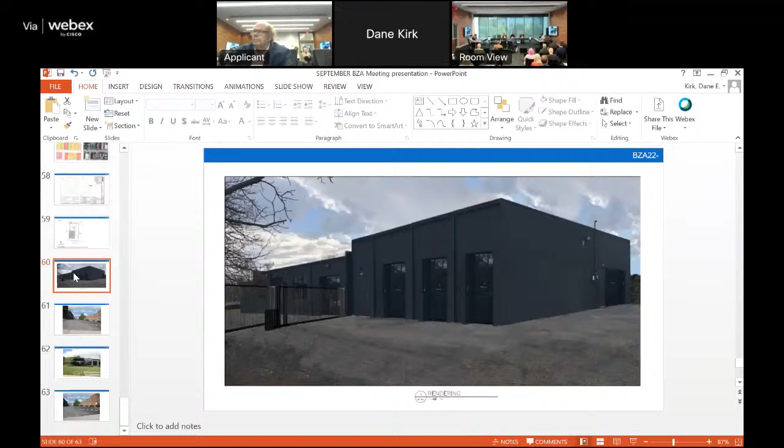The applicant proposes to legitimize an existing parking area and is requesting a variance to allow parking spaces to reduce the minimum parking space size from 9 by 18 feet to 9 by 17.9 feet. Planning has no comment on the variances as the Fifth by Northwest Area Plan and Columbus citywide planning policies do not address individual parking spaces. Planning acknowledges that the variances are to legitimize existing site conditions, which are generally consistent with the plan's design guidelines. Division of Traffic Management has no comments, and the Fifth by Northwest Area Commission recommends approval of this request. Staff can also recommend approval as the variances are negligible and are to legitimize existing conditions which are generally consistent with the plan's design guidelines.

This should be a no-brainer for us guys. Yes, thank you very much.

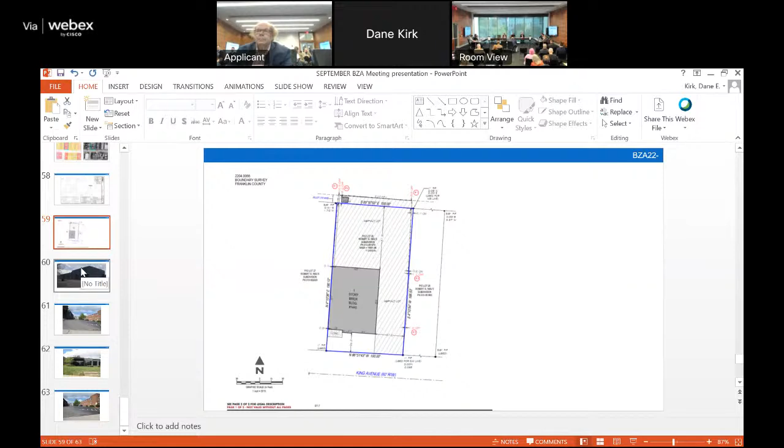Mr. Bender, do you have the recommendation of the Fifth by Northwest Area Commission as well as city staff? We would agree that it is a negligible reduction or a request for reduction.

Do you have anything additional that you would like to add at this moment? Just that I'll take any questions that you might have. Okay, and thank you for bringing this up.

I've been on the graphics commission for 28 years, so. Thank you for your service, excellent job you do, and you got a big business. I know I'm not saying a whole lot. Okay, thank you so much.

Is there anyone in the audience that would like to speak for or against this proposal? Seeing and hearing none, the question's been called.

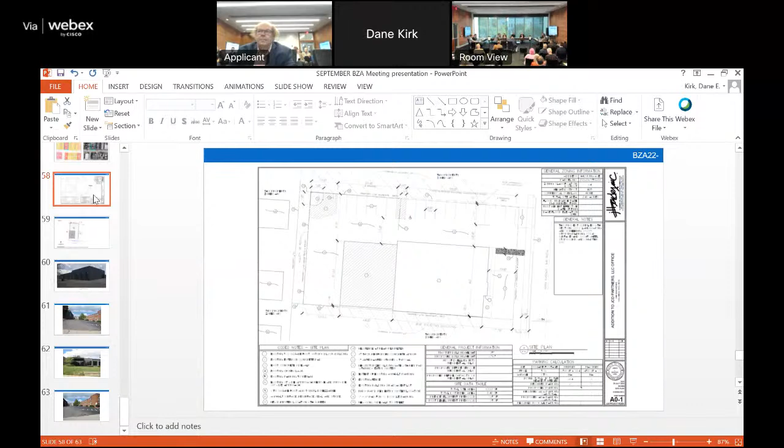Please call the roll. Mr. Malika, yes. Mr. Mora, yes. Chair Jones, yes. Your variance is granted. Good luck with your project. Thank you so much, my pleasure.

Case BZA 22-026, 1812 West Fifth Avenue. Hello sir, would you please give us your name and indicate whether or not you've been sworn? David Hodge, attorney for the applicant, and I have been sworn. Thank you very much, Mr. Hodge. City staff? 1812 West Fifth Avenue is located at the northeast corner of West Fifth Avenue and Wyandotte Road.

The site is zoned C4 commercial and is within the Fifth by Northwest Area Commission. The site is currently developed with a dry cleaning operation. This current use is a mix of commercial, including retail, eating and drinking, and office. The applicant proposes to convert the existing building to an eating and drinking establishment and requests a variance to legitimize existing conditions for a parking lot and reduce the number of additional parking spaces from 23 to 0.

The existing condition, I'm sorry, 23 to... 6. 6, yes, that's a new change, new site. The existing conditions are reduced aisle, reduced maneuvering, limited parking space, and a reduction in the number of bicycle parking spaces from 2 to 0 as well. Bicycle parking will be located in...

Planning generally supports the proposal, but requests additional bike parking to mitigate the parking reduction. As I said, the parking will be provided in the aisle. However, since it's not in the property, a variance is necessary.

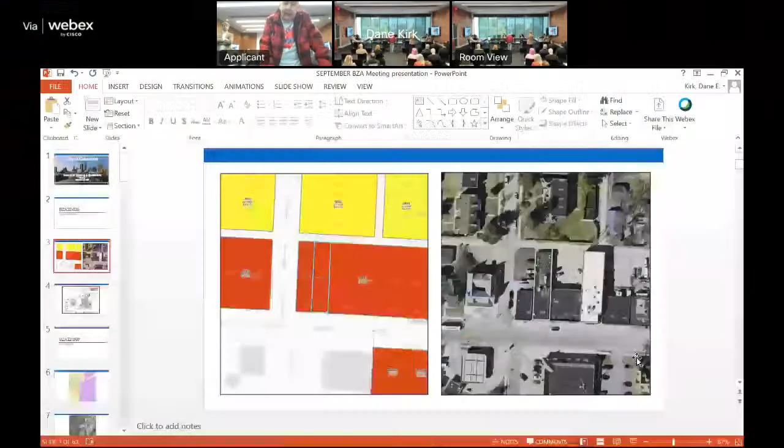So does anybody have any questions for me? What kind of business do you have? There's a bookstore currently, I'm repairing my building. It has been a laundromat and I had fire damage, so I'm in the process of fixing the building back up. And then there's a bookstore next door where the building is also being repaired due to smoke damage. But as I said, I've owned the building for 50 years, and parking has always been tough on Fifth Avenue, and with all these variances, it'll drive me crazy.

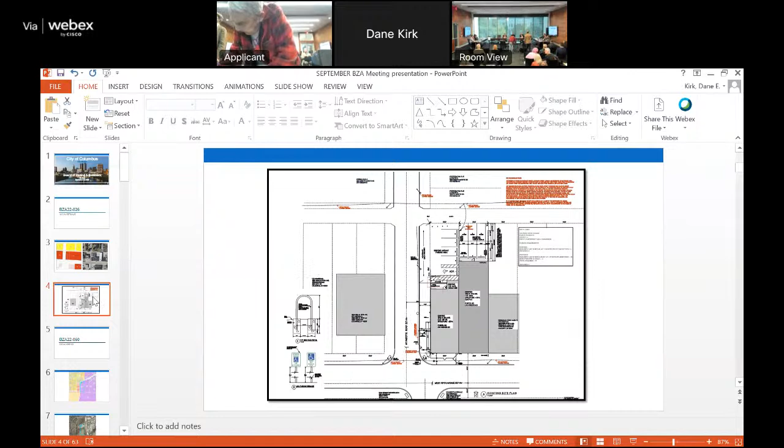Okay, would you please sign in on that sheet? Sure, thank you so much. Is there anyone else here to speak for or against the proposal? Any questions from board members? I'm a little confused. So if he owns a laundromat, I thought you were buying a laundromat. So I'm confused.

I believe his use is just east of us here on the screen. So if I could come up here. This was a laundry facility here, Mr. DeMoro, and what we aim to do is knock the back of the building off and do that stack configuration. I believe this is this gentleman's property here, and he had some kind of laundry in there at some point, and it's been, I guess, in the process of being converted to a bookstore.

What's interesting about this site is you can see that it's built right from the southern property line to the northern property line at the alley. It's a C4 property, commercially zoned, probably C4 since zoning got adopted in the city of Columbus. Commercial use with how many parking spaces on it? Zero.

This is a condition in these older developed urban neighborhoods where zoning came along after the fact and assigned the most appropriate zoning, but it never has met the development standards. Here we have a very successful business that came in and made use of this. They're providing the parking here. They want to expand into here and do this. Some of these variances we're talking about with the aisle and maneuvering are just technical variances that allow this stacking configuration we discussed on the site plan. It's really a suburban standard, and we're in an urban neighborhood here.

But if there are issues, a need for us to reach out to the adjacent property owner and work through some of this with a board of 3, I'd like to hear about it. We can table and go back to the drawing board and come back and have a hearing next month.

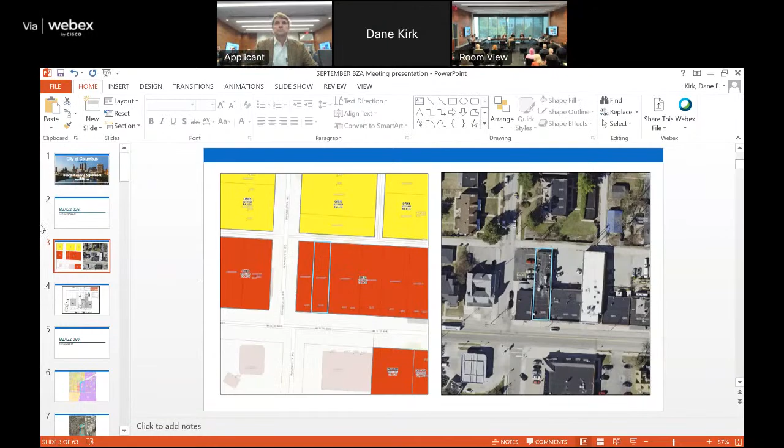Anyone want to call a question? I'll call a question. Question's been called, please call the roll. Mr. Morrow? Yes. Mr. Malika? Yes. Chair Jones? Yes. Variances are granted. Good luck. Thank you all very much.

Please give us your names and indicate whether or not you've been sworn. I'm Joel Sigler with AEP, and yes, I've been sworn. John Worley, consultant, and have been sworn. Please sign in on the list.

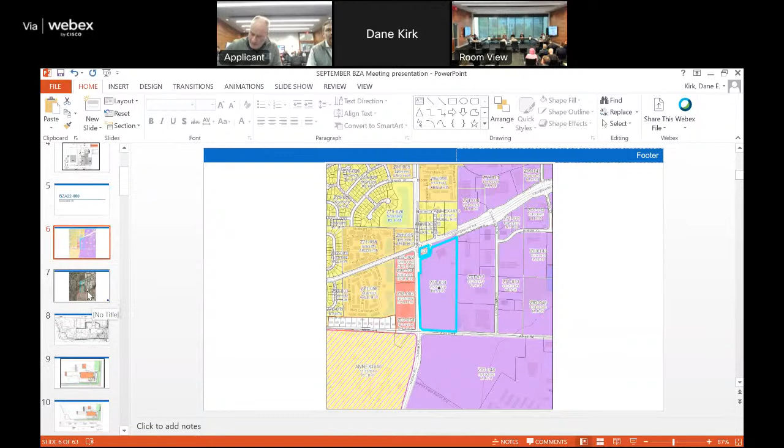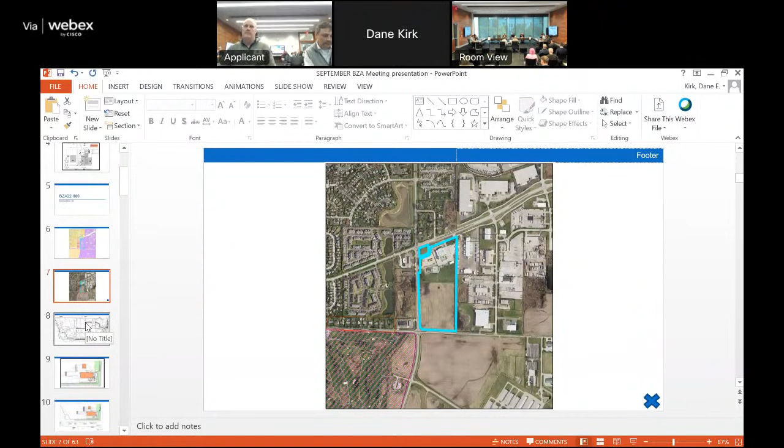BZA 22-060, 5500 Alkire Road is located at the northeast corner of Norton Road and Alkire Road. It is zoned M1 manufacturing as part of the Westland Area Commission. The 14.73 acre site is undeveloped. Surrounding uses are commercial to the west, an undeveloped parcel to the south, and residential to the north. The applicant proposes to construct an electrical service center with parking and a backflow prevention meter enclosure. Variances are requested to reduce the building setback from 200 to 133 feet and to reduce the parking setback from 25 to 5 feet.

Planning is in full support of this proposal. The revised site plan includes landscaping screening along Norton and Alkire roads, consistent with C2P2 planning guidelines. Staff supports this proposal with the understanding that applicant will consult with the city forester on the placement of street trees along Norton and Alkire frontages. Division of Traffic Management has no comments, and the Westland Area Commission recommends approval of this request. Staff recommends approval as the proposed site plan is consistent with C2P2 guidelines, with the condition that the applicant commit to a stamped landscape plan.

Mr. Chairman, thank you Adam. Is this the one that we didn't notice the public previously? Okay, thank you. So we've heard this, and you have the recommendation of city staff and no concerns from traffic management. Is there anything additional that you feel you need to add? We're just answering any questions you might have.

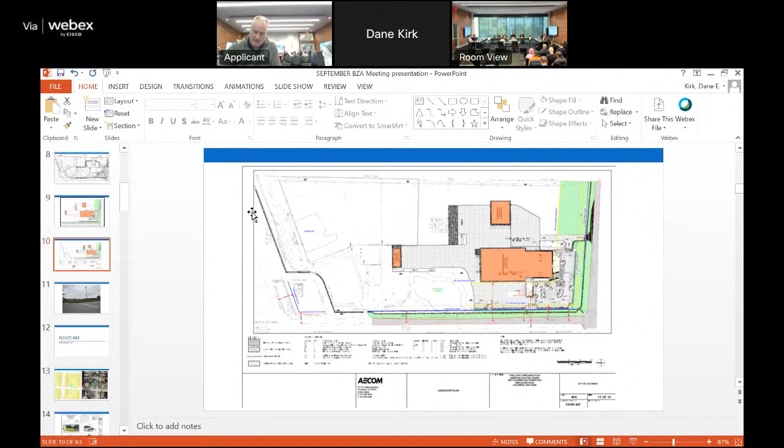Is there anyone in the audience that would like to speak for or against this proposal? Question. The question's been called, please call the roll. Mr. Malika? Yes. Mr. Morrow? Yes. Chair Jones? Yes. Variance is granted.

Good luck with your project. BZA 22-061 for 928 Siebert.

Hello, would you please provide your name and indicate whether or not you've been sworn? Delicia Magania Gonzalez. Yes, I have. Did they take the sheet to sign? Yeah, that's in front of you. Yes please, are you authorized? I don't see your name down as an applicant or the agent.

BZA 22-061, 928 Siebert Street is located on the north side of Siebert Street, approximately 140 feet east of Ohio Avenue. It is zoned R4 residential and is part of the Columbus South Side Area Commission. The 0.05 acre site is undeveloped. Surrounding uses are primarily single and two-unit dwellings. The applicant proposes to construct a single-unit dwelling with an attached garage.

Variances are requested to reduce the minimum side yard requirements from 5 feet to 3.5 feet, to reduce the minimum rear yard percentage from 25 to 20.3%, and to allow a single-family dwelling to be situated on a lot less than 5,000 square feet in area.

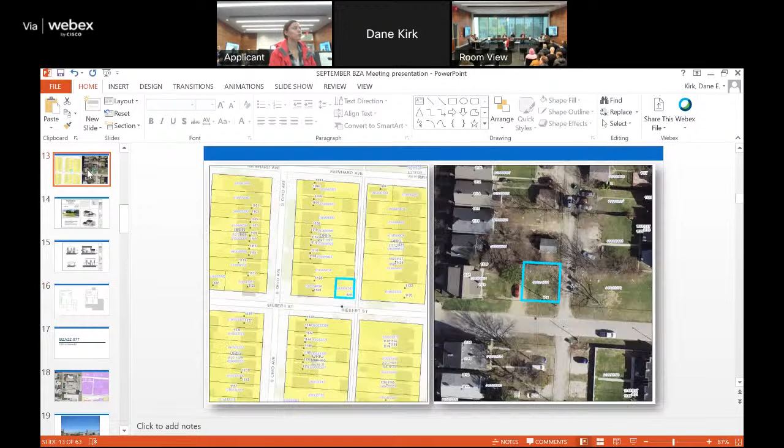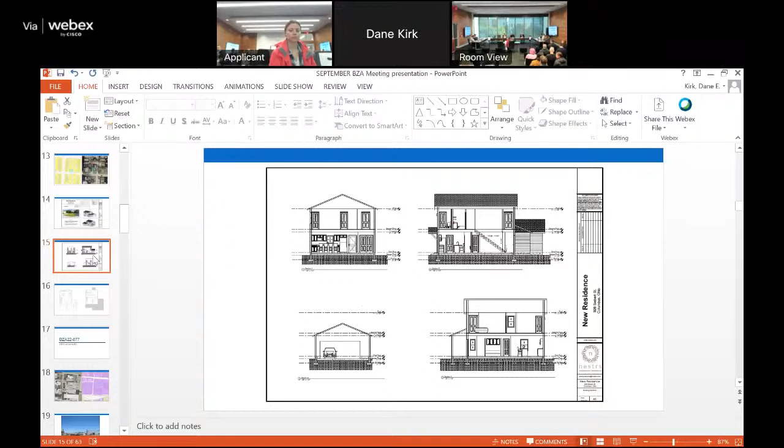Planning is in full support of this proposal. The site plan and elevation relocates the garage to be accessed from the alley, consistent with C2P2 guidelines, while preserving windows and doors addressing the Siebert Street frontage. Staff support with the understanding that the site plan will be revised to include a sidewalk along Siebert and possibly a relocated tree in response to comment from the Division of Traffic Management.

The Division of Traffic Management comments that the proposed building construction sidewalk will be required to be constructed along the Siebert Street frontage of the site. Staff can recommend approval. The site plan and elevations relocate the garage to access from the alley, consistent with C2P2 guidelines, preserving the windows and doors addressing the Siebert Street frontage, with the condition that the final site plan will include a sidewalk along Siebert Street.

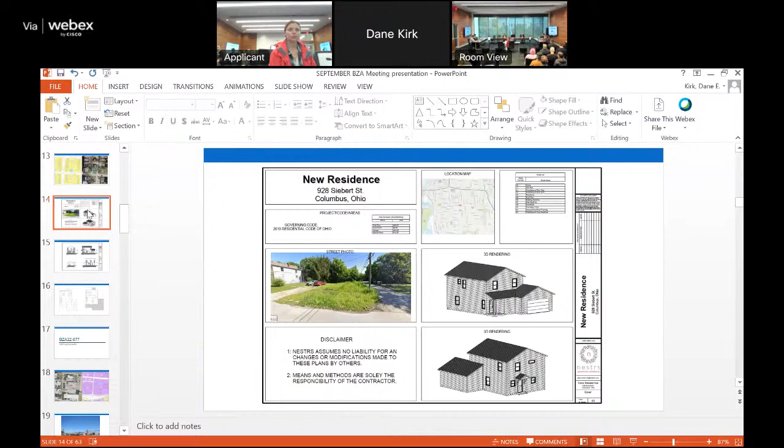Okay, thank you very much, Adam. You have the recommendation of the area commission for acceptance, as well as city staff. Would you like to add anything additional?

No, that sums everything up. We will add a sidewalk along Siebert Street, and we did move the tree out of the field of vision for the traffic department. Basically, we're just requesting these variances so the vacant lot can be buildable.

Okay, thank you so much. And I'm just curious, is R4 also zoned for multifamily, and you chose to build a single family home? Yes. Okay, this condition that is stated here, you're saying we don't need that? The condition will remain, you just don't need to stamp the sign. Got it, thank you.

Is there anyone in the audience who would like to speak for or against this proposal? Call the question with the condition. Question's been called. Mr. Morrow? Yes. Mr. Malika? Yes. Chair Jones? Yes, variance is granted. Good luck with your new home.

Thank you. You're welcome. BZA 22-077 for 2260 Lockbourne Road.

2260 Lockbourne Road is located on the east side of Lockbourne Road, approximately 300 feet from Refugee Road, and it's zoned M Manufacturing and is part of the Far South Columbus Area Commission. The 4.69 acre site is developed with a maintenance service center. Surrounding uses are primarily manufacturing.

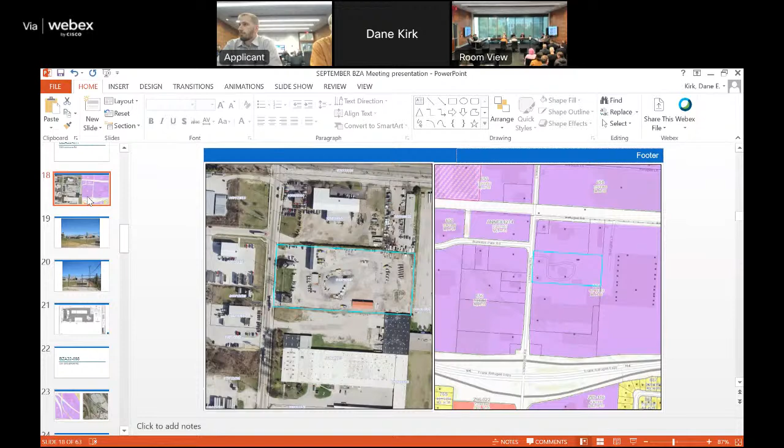Thank you very much, Adam. Can somebody walk me through this vision clearance thing? I don't understand where we are with that. Why are we recommending approval to it? Yeah, can I, if I see it, maybe I'll understand it better.

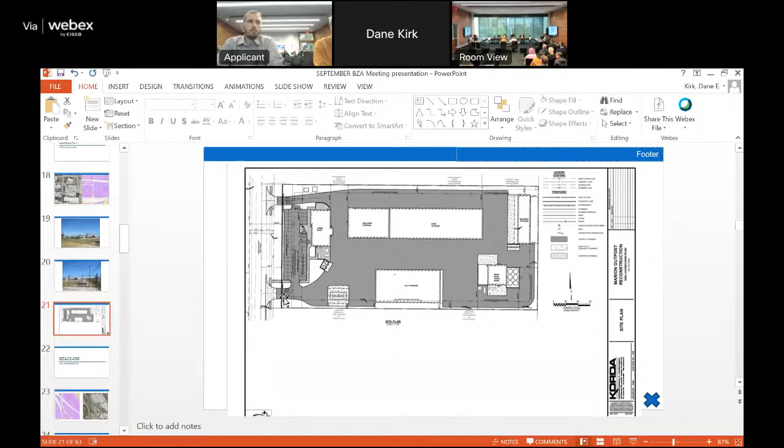That's the exit on the Lockbourne? Yeah, entrance and exit, or? I'm having trouble just, maybe traffic, because I know they've gone back and forth a couple times with traffic. So, I believe they are, so it's either obstructed or it's not. Could you just reflect, possibly zoom in on that, to show the vision clearance where that would be requested?

Does the sidewalk obstruct it, or what's the obstruction? Probably the fence. It looks like there's just a right of way that's being required to be dedicated.

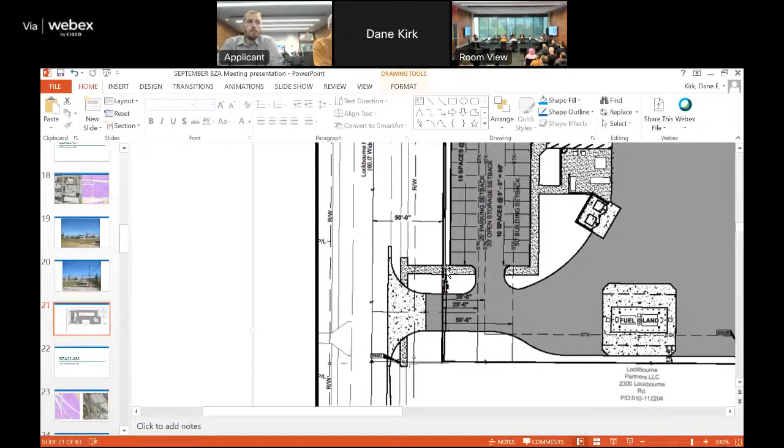As you can see, the sidewalk is well set in front of the fencing. So there is a variance that almost looks like reducing it to zero. That would not obstruct the sight lines for folks to see pedestrians walking along Lockbourne, and there's ample space to see when a vehicle exits onto Lockbourne to see conflicting traffic. So it's really a function of the additional right-of-way dedication that's being required.

Got it, thank you so much. Anything additional that you'd like to add?

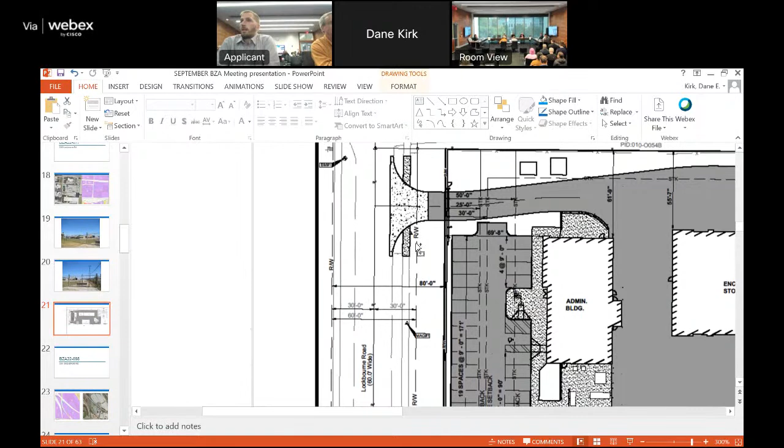Yeah, just on that topic - the plan we're looking at is actually an older one. We submitted several revised ones that are more up to date. The fence actually did shift back a little bit. You mentioned zero setback - it's actually 5 feet now.

Well, where are these plans? We need to know what is real today. Well, what's on the agenda is the accurate variance request. It's just this is not accurate. Yeah, they went to chain link fence with 5 feet, went to 5 feet, not 0.

Okay, anything additional? Yeah, sure. So it really just comes down to the space on this site. The public service has a specific set of requirements for these facilities, and their equipment and vehicles take up a lot of space, need a lot of maneuvering. So we're trying to use every square foot of this property that we can, and allowing these variances helps us best do that and help them best serve the public with this facility. Okay, thank you so much.

Anyone in the audience who would like to speak for or against this proposal? Seeing and hearing none. Question.

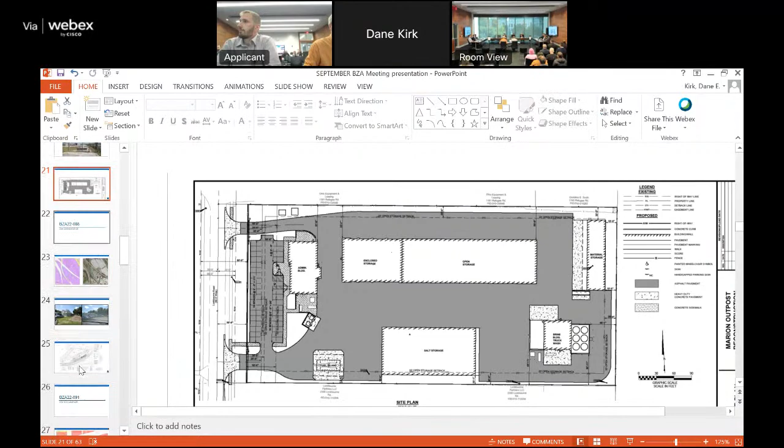Question's been called, please call the roll. Mr. Malaka? Yes. Mr. Mora? Yes. Chair Jones? Yes, variance is granted. Did you guys sign in? Yes. Thank you so much.

Case BZA 22-088, 3501 Groveport Road. This you, Adam? Oh, no. Gets a little break.

Hello, Mr. Ingwerson, I don't think you were here to be sworn. Could you please raise your right hand? Do you swear or affirm that the testimony you'll provide is the truth to the best of your knowledge and belief? If so, say I do. I do. Thank you so much. Just sign in there for me if you would. Yeah, and go ahead, Stephen.

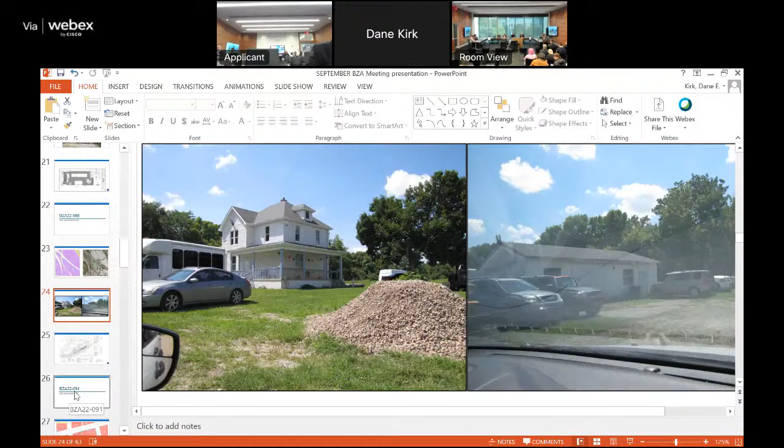3501 Groveport Road is located on the east side of Groveport Road, approximately 880 feet northwest of Williams Road. It is zoned M Manufacturing District and is located in the Far South Columbus Area Commission. The 7.22 acre parcel is currently developed with 2 structures and is utilized as storage space for a truck repair business located directly to the southeast. Surrounding uses are primarily manufacturing, with a railroad bordering the property along the northeast property line, a distribution center to the northeast, a truck repair and storage facility to the southeast, a recycling plant to the west, and a train yard further to the northwest.

The applicant proposes to utilize the property as an automobile salvage yard and is requesting a special permit to allow an automobile salvage yard in an M manufacturing zone district. The plan supports the proposal as presented.

The Tri-South neighborhood plan states that expansions of existing uses shall be screened to reduce noise and obscure views. C2P2 states that external storage which generates noise and other impacts should not face the public right of way and should be fully screened. Planning notes that the proposed location does not front on any right of way, is naturally screened to the north and west, and abuts similar outdoor storage to the south and east. Furthermore, the proposal calls for fencing which will further screen the proposed use. For these reasons, planning supports the proposal as presented.

The Division of Traffic Management is working with the applicant to resolve potential minor issues with configuration of the southern emergency access lane, connection with the main site entrance drive, as part of the final site compliance plan process. All other Division of Traffic Management staff review comments have been resolved - I believe since the writing of this report that comment has been resolved, and they've just taken care of the emergency access lane.

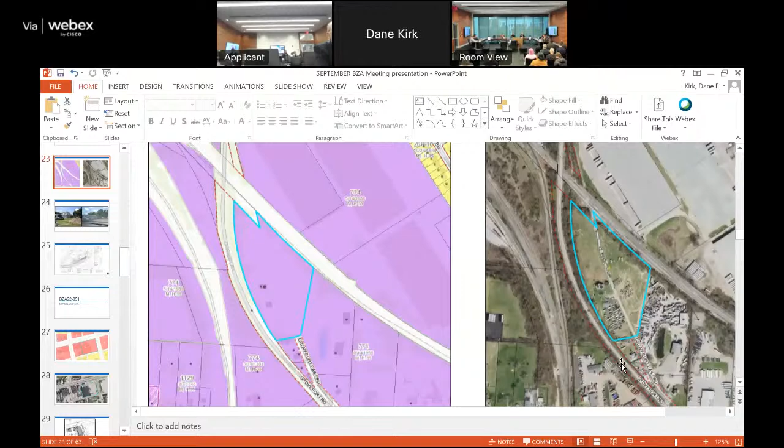Thank you very much. Mr. Ingwerson, are you okay with the condition of maintaining the existing screening? Yes. Okay, do you have anything additional?

You do have the recommendation of approval from the City of Columbus. It sounds as though you're resolving issues with traffic management, as well as recommendation of approval from the Far South Columbus Area Commission. Anything additional you'd like to add? Unless you have any questions.

No. So you've been cited on this because you guys were operating this before you had the permit to do so. Is that correct? Correct. And had you not been caught, would you still be doing it?

Yeah, yes. I mean, the actual development of the site needed a special permit, and it was explained to the owner that that's what needed to happen. So he engaged another engineer before he engaged me, and we're trying to go through the process and get him squared away. Okay.

Anybody in the audience who would like to speak for or against this proposal? Any additional questions from board members? I'll call the question. Question's been called.

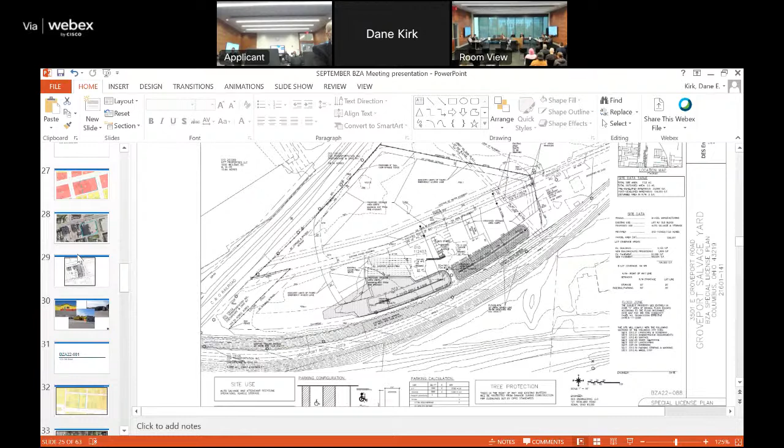Please call the roll. Mr. Morrow? Yes. Mr. Maleka? Yes. Chair Jones? Yes. Special permit is granted with the condition as recommended from the city.

Thank you very much. And did you sign in for us? I did. Thank you so much.

BZA 22-091 for 1454 Oak Street. Thank you.

William Fisk, I live at 1454 Oak Street. And you've been sworn, Mr. Fisk? I have. Thank you very much. Sign in on the sheet there, and you can have a seat.

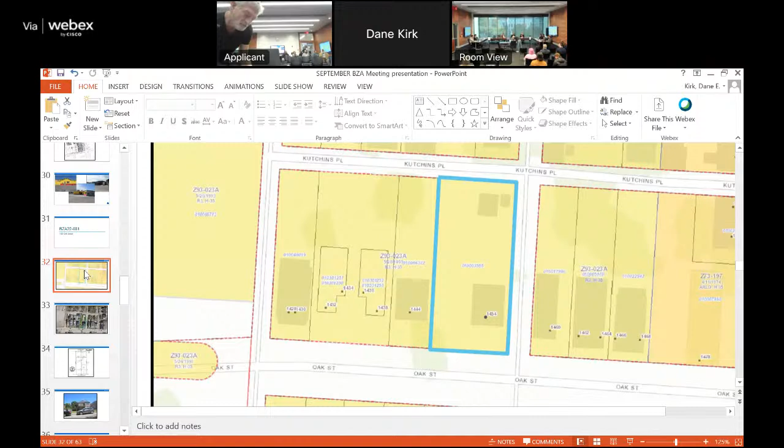1454 Oak Street is located on the north side of Oak Street, approximately 235 feet west of Miller Avenue. The site is zoned R3 and is located within the Near East Area Commission. The 0.25 acre site is currently developed with a single unit dwelling on a 72-foot wide by 153-foot deep lot. Surrounding uses are single and 2-unit dwellings.

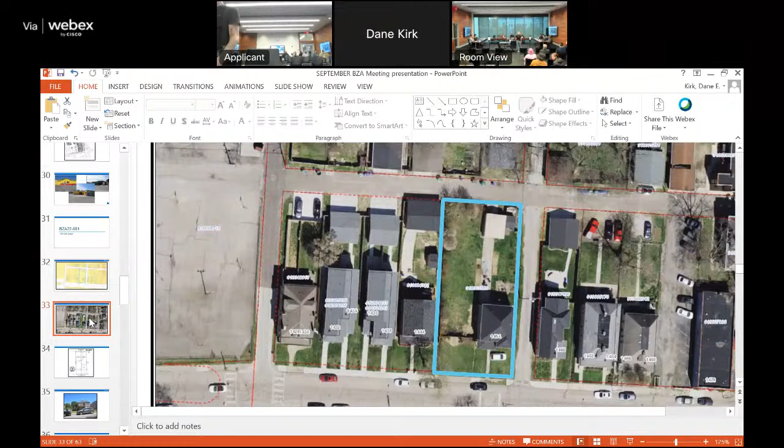The applicant proposes a lot split so that they can sell or develop the new lot. The request is a variance to reduce the lot width of parcel A from 50 feet to 37.4 feet, and to 34.6 feet for parcel B. So the existing lot A with a single unit dwelling is here. This would be the new lot after the split. The Near East Area Plan recommends that housing should be developed at the existing parcel sizes.

The Division of Traffic Management states that no access, such as a driveway, will be permitted to Oak Street, and that access to the site will need to be taken from Kutchins Place, the alley to the rear. The Near East Area Commission recommends approval, and city staff can also recommend approval, as the proposed lots would return the sites to their original parcel sizes as recommended by the plan and is therefore supported.

We're not asking for any conditions. Thank you very much. You have the recommendation of approval from the area commission as well as the city staff, with no issues with traffic management except for access. Do you understand that? Yes. Okay, anything additional you'd like to add? No. Thank you very much.

Anybody in the audience who would like to speak for or against this proposal? Any questions from board members? I'll call the question. Question's been called, please call the roll.

Mr. Malaka? Yes. Mr. Mora? Yes. Chair Jones? Yes, variances are granted. Good luck with your project. Thank you very much. Yes.

BZA 22-092, 130 West Henderson Road.

Good evening. Good evening. Thank you, what is your name? Robert A. Harwood, representing Cameron Nickel. And you've been sworn? Please raise your right hand. Do you swear or affirm that the testimony you'll provide is the truth to the best of your knowledge and belief? If so, say I do. I do. Thank you very much. Please sign in.

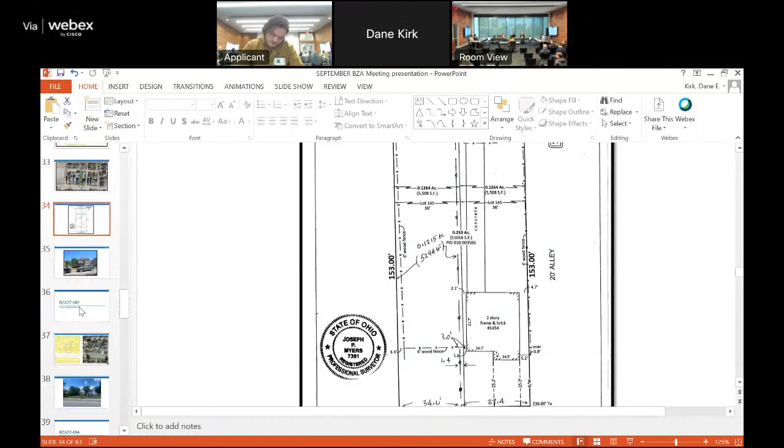BZA 22-092, 130 West Henderson Road is located on the north side of Henderson Road, approximately 280 feet west of Rosemary Parkway. The 1.11 acre site is developed with a single unit dwelling. Surrounding uses are primarily single unit dwellings. The applicant proposes to install a vehicle turnaround area in front of the dwelling.

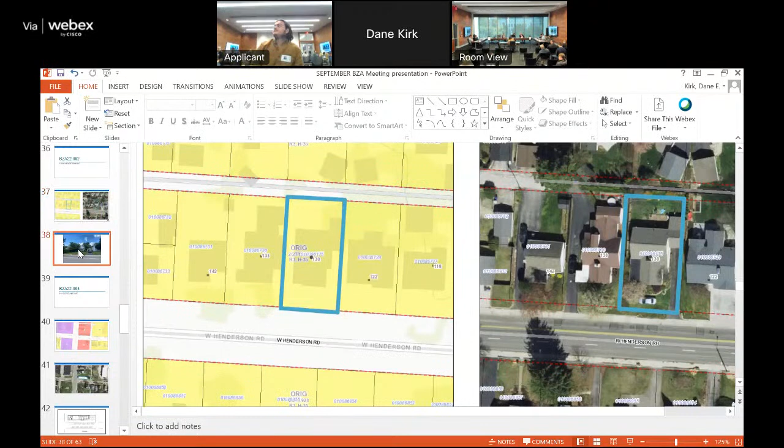A variance is requested to allow a maneuvering area between the street right-of-way line and the parking setback.

Planning is supportive of the received site plan and requests some form of landscape screening along Henderson Road frontages prior to moving full support, consistent with the Clintonville neighborhood plan guidelines of balancing parking needs with the impact of the natural environment. Division of Traffic Management has no comment, and the Clintonville Area Commission recommends approval of this request.

Staff can recommend approval as the requested variances allow for safer entry from a driveway onto a highly trafficked road, and the proposed area will be used as a turnaround and not for vehicle parking. We have the condition that the site plan be stamped, so they cannot park a vehicle there. It's just for turnaround.

Thank you, Mr. Chair. And you do understand that, right? Correct. I'm just curious, do you plan to improve the surface? Yeah, we received quotes on getting asphalt. Are we okay with that? Yeah, they would need a variance otherwise to park or turn around on gravel or grass. I was just thinking asphalt's pretty covering. Have you thought about pavers, like open pavers, so grass can still grow? You're not creating a concrete jungle or asphalt jungle. It's been a consideration, but I think we'd like it to match the current driveway. But again, it's not really for driving, it's for maneuvering. But up to you. Anything additional you'd like to add?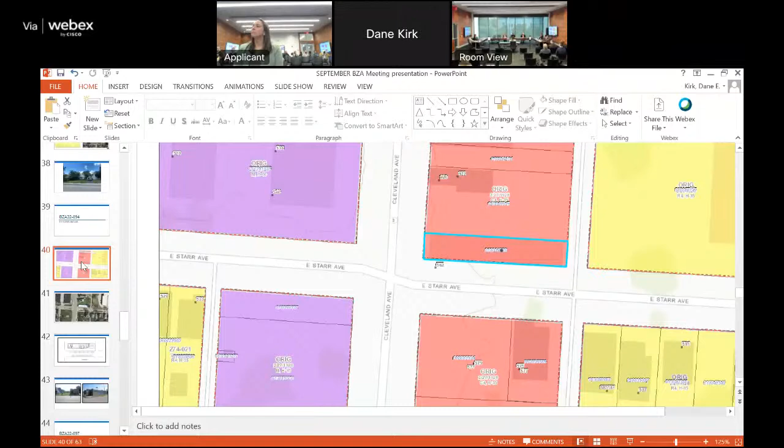BZA 22-094, 914 Cleveland Avenue is located at the northeast corner of Cleveland Avenue and East Starr Avenue. Site is zoned C4 commercial and is within the Milo Grogan Area Commission. Site is currently developed with a 2,100 square foot warehouse attached to a single unit dwelling. Current uses include a park and 2-unit dwelling to the south, a residential dwelling to the north, an industrial building to the west, and a live work artist community to the east.

The applicant proposes a change of use from storage to a medical marijuana control program retail dispensary. An Ohio Medical Marijuana Control Program retail dispensary requires a special permit from the Board of Zoning Adjustment, and the change of use requires a variance to reduce the minimum number of additional parking spaces from 2 to 0.

The existing warehouse use incurs parking at a rate of 1 space per 1,000 square feet. At 2,100 square feet gross floor area, the existing development would be credited 2 parking spaces. The same 2,100 square foot building at proposed retail would incur parking at a base rate of 1 space per 250 square feet, with a parking reduction of 50% because it's in the urban commercial overlay. This means the new use would require 4 parking spaces, half of which would be 2.

Both the Milo Grogan neighborhood plan and the Columbus Citywide planning policies recommend minimum parking space reduction requests where on-street parking is available. Staff note the site is located on a transit corridor and within a walkable neighborhood. C2P2 does not address a special permit request. The Department of Public Service can support a requested variance to reduce the minimum number of parking spaces, and advise that with the proposed demolition of the residential structure to the rear of the site, the existing driveway with access to East Starr Avenue will need to be removed.

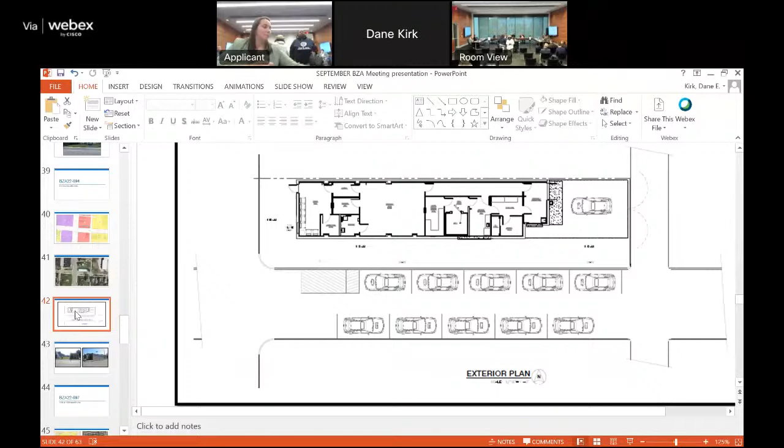Hi, my name is Angelique Sutton. Have you been sworn? Yes, I have. Thank you. I just want to question — you said there's additional parking in the back. There's a house back there. Next to the house is an alley.

The open lot across the street, that's Rhodes parking lot. That's not an open parking lot, and they are doing further building there, so it's not open for the public. I'm currently talking to the developers. We're not going to get into the back and forth. Anything additional? I'm just letting you know that's what it is. No, appreciate that, for sure.

We are working on developing housing and stuff right now. The parking there will be for that housing. As I stated before, that whole area right there is pretty much taken up for the parking. There's not going to be no extra room for no one to park.

You can't park on Cleveland Avenue. It's illegal to park on Cleveland Avenue in front of that building. You cannot park there. So on Starr Avenue, where their park is, on the south side, right across from that facility, that's a park used for the community. When they are able to park there, they park there and have their kids go over to that community park. Up from there, you have all the other houses where people and residents live.

There's no room. So what's going to happen is when they do come, they're going to come out and park up and down Starr Avenue, just like they are up there off of Cassidy and Sunbury, and cause a bunch of problems. Like we said before, we're not against it, but we just don't want to see it there. It's just going to cause more problems with the parking we're already having.

Thank you so much. Thank you. Yes, ma'am.

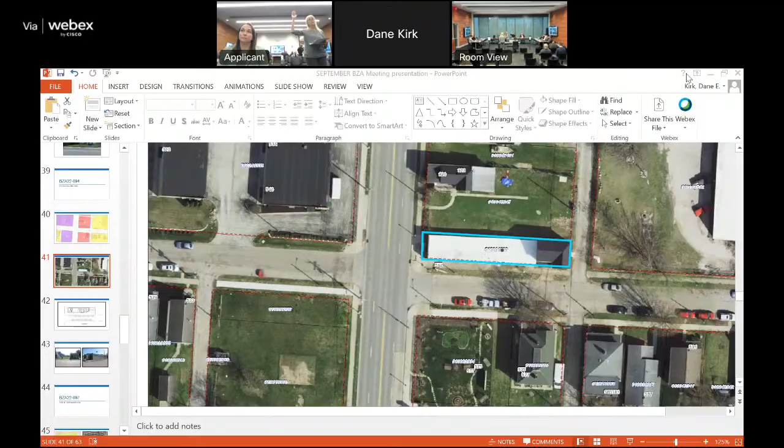Would you please indicate your name and whether or not you've been sworn? I've not been sworn, I'm Deborah Patrone. Please raise your right hand. Do you swear or affirm that the testimony you'll provide is the truth to the best of your knowledge and belief? If so, say I do. I do. Thank you.

I have a couple pictures. You can't come up here, you have to hand them to staff. I was going to table, I didn't see them. Oh, if you don't have to, I thought you were bringing something in. I didn't know. No, they're not mine to keep, necessarily.

Along the alley, there are businesses and properties on Cleveland Avenue, between Third and Starr Avenue. There's always going to be a temptation for people to park on that private property where they have their own parking behind their buildings. Access to the alley has to be there. It's a thoroughfare for picking up the garbage. So it cannot be blocked off unless there's a change in the facilities.

Yeah, and I don't know, but they will need a permit, I believe, to demo the house behind the building. That's not within our purview. I know that, but to assume that that can be used for that, that's going to be part of this as well. You understand what I'm saying? It can't be part of this argument today as well. We don't know if that's going to happen or not.

A lot of this is built on assumptions, and I want you to keep in mind that we know the reality of parking in Milo Grogan. And the reality is it gets congested. We may have photographs where it isn't, but people do go to work, and when they come home from work, they won't have a place.

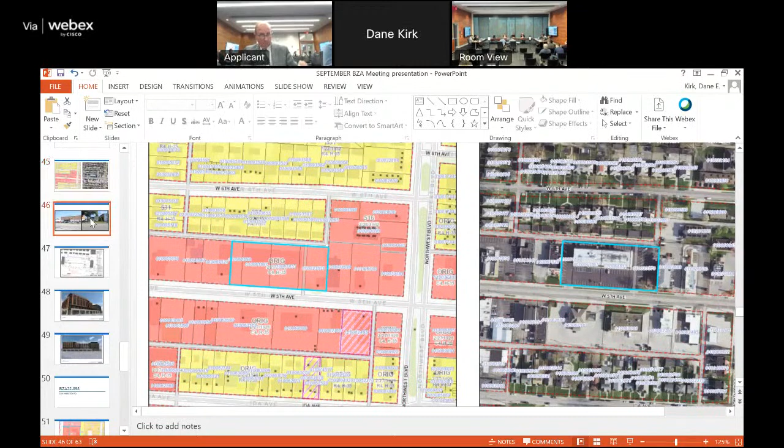1334 and 1350 West Fifth Avenue is located on the north side of West Fifth Avenue, approximately 300 feet west of Northwest Boulevard. It is zoned C4 Commercial District and located in the 5th by Northwest Area Commission. The 1.17 acre site is currently developed with a 41,000 square foot multi-tenant office building, a pet groomer, and associated parking. Surrounding uses include multi-unit residential to the north, restaurants and medical office to the west, a multi-unit dwelling and eating and drinking establishments to the east, and a bank, daycare center, and a restaurant to the south.

The applicant is proposing to raze the existing building and construct a 6-story mixed-use building with ground level retail, multi-unit residential above, and a parking garage.

Variances requested are to allow bicycle parking to be located in a not highly visible location in the parking garage, to reduce the 10 by 10 vision clearance triangle to 6 by 6 to allow for stacked parking spaces, to reduce the number of required parking spaces from 295 to 188, to increase the maximum allowed height from 35 feet to 82 feet, to increase the allowable frontage of driveways and pedestrian entrances to a parking garage from 20% to 21.2%, and to reduce the number of required loading spaces from 1 to 0. Planning is in full support of this proposal.

Staff are supportive of the additional information provided by the applicant regarding infill of the West Fifth Avenue garage entry into a future storefront consistent with C2P2 guidelines, stating ground floor uses address and contribute to the street. Staff also note the provision of bicycle parking above that which is required by code, consistent with C2P2 guidelines regarding parking reductions. The Division of Traffic Management states that with the revised site plan...

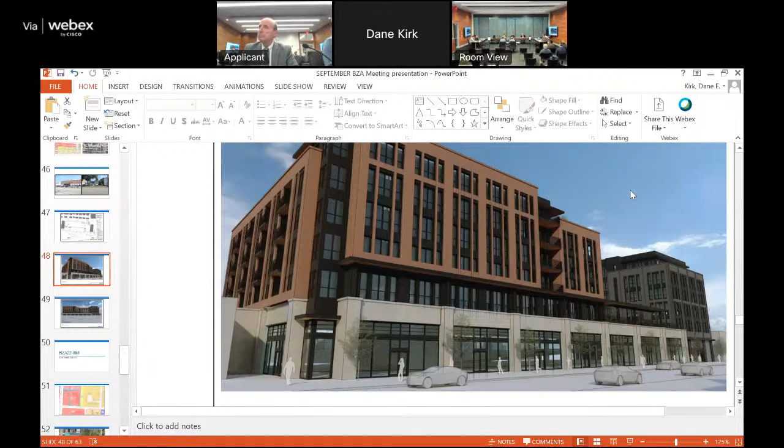And I believe, since today a letter was issued stating that no right-of-way dedication is necessary, that the variance for bicycle parking to be located in the garage and the vision clearance triangles, I believe those are going away, but I would let the applicant explain that. Okay, I'm curious, since when don't you take the right-of-way dedication?

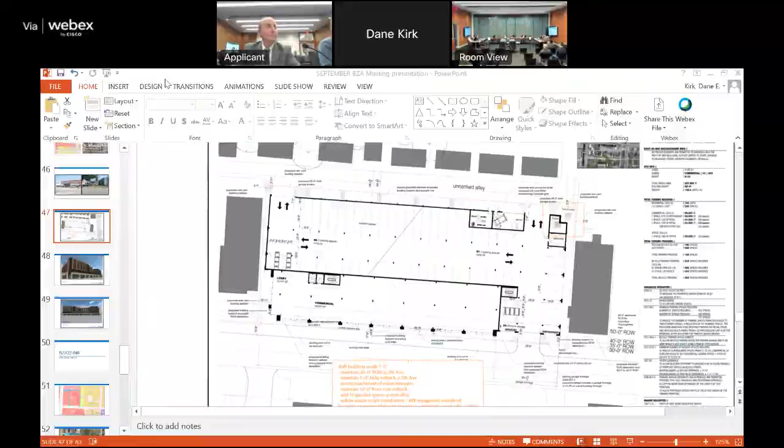Well, in this instance, we looked at the thoroughfare plan and the existing corridor, and there's been a number of right-of-way dedication exception requests that have been granted in this corridor due to the urban nature. So it did make sense for us to not require that, in consideration of the other elements on the site.

Okay, thank you, Mr. Gleckschmidt. So you have the recommendation of approval from the City of Columbus, and it appears as though you've cleared things with the Division of Traffic Management. Do you have anything additional that you'd like to add?

Thank you, Mr. Chairman, Board Member Maleka, and Senator Demora. I sincerely want to thank staff for their efforts, particularly BZA staff member Stephen, as well as traffic engineering, Mr. Moorhead and Mr. Blacksmith. My client has made a great effort to work with the community. I think it's a transformative project for the neighborhood and meets the practical difficulty standards. Although no hardship is required for this variance, my client feels that he does have a hardship - unfortunately, that his hardship is his lawyer. But other than that, we will meet the practical difficulty standards. Thank you, Mr. Chairman.

Is there anyone in the audience who would like to speak for or against this proposal?

Anything from my colleagues? So it's my understanding there are going to be some affordable houses as part of this development, supportive housing? Thank you, Mr. Moore. Yes, sir, 20% of these units will be workforce housing.

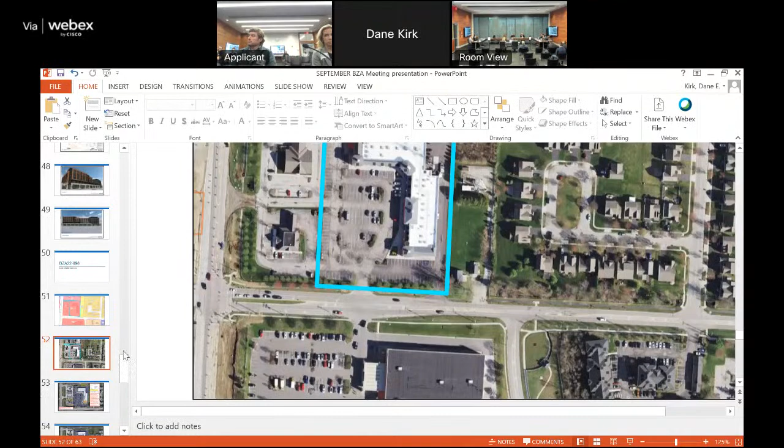Division of Traffic Management states that a right-of-way dedication of 60 feet from the center line of Hamilton Road will be required. The Northland Community Council recommends approval, and I do see the representative from Northland here to speak more on that. City staff will recommend approval as a proposed drive-through will lead to increased parking lot landscaping and screening while only removing a small number of parking spaces.

And we recommend the applicant commit to the stamped landscape plan. Again, for the record, we are only asking the applicant to commit to the landscaping, as there may be issues with the Division of Traffic Management based on the actual numbers on the landscape. Let Mr. Glushman speak more to that if he wants to.

Yes, if I could just briefly. So the drive-through configuration may require some adjustments to what is shown in the plan there. So in regards to the variance that's being requested, we have no issues with that variance to reduce the number of required parking spaces, but there may need to be adjustments just with the site circulation that's shown on the current plan there.

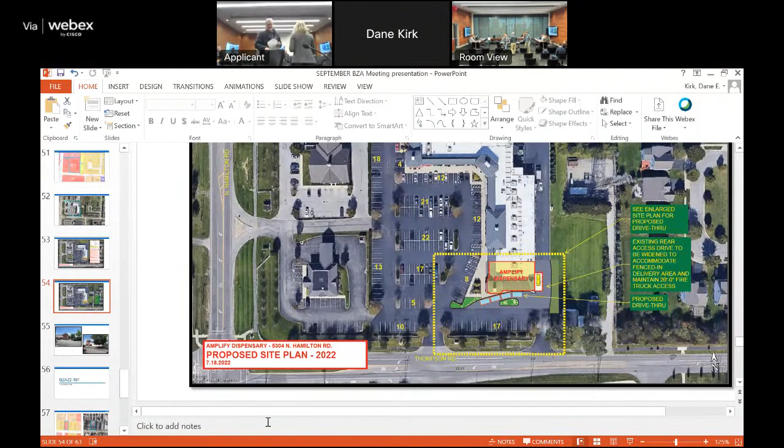Have you been sworn? I have not, sir. Please raise your right hand. Do you swear or affirm that the testimony you'll provide is the truth to the best of your knowledge and belief? If so, say I do. I do. Thank you. My name is Dave Paul.

I'm co-chair of the Northland Community Council Development Committee. I would like to say that we share perhaps this board's frustration at its role in terms of granting special permits. I understand that's not what we're talking about here. I will say, though, that our committee did support that application to the extent we were able to do so for the special permit and also supported this variance.

We understand what the applicant is doing, and this particular applicant has taken some special pain, we think, to go and talk with their neighbors, neighboring tenants, not just property owners, but the businesses operating around them, to understand the potential impact on those businesses. We did not have any of those businesses or property owners respond to our invitation to speak with us and indicate whether they thought there would be problems in reducing the number of parking spaces. I don't know that the applicant heard any negative feedback from their neighbors, but we commend them for at least asking. With that, our committee did vote 15 to 1 with 2 abstentions to recommend approval of this application, and we appreciate the applicant's work with us to ensure that it's a good use in the community.